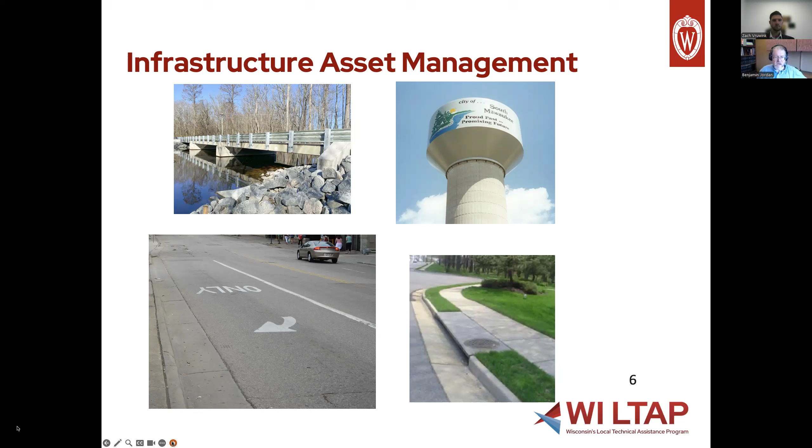And I put a few photos here to kind of represent the types of assets that we're dealing with in local government and cities and villages. These are ones that are visible. I can take a picture of them and you can see them, driving down the road, walking down the street every day. There's other assets that are hidden, and we'll talk about that difference as well.

So you have bridges, you have your street pavement assets, you have your water utility system, you have on the lower right, you have stormwater, and you're seeing an inlet, which is a place where water is taken into that system. And so that's visible on the surface. There's obviously a lot of that system that's buried under the ground. The same with the water system. All of the distribution piping is buried under the ground. You see the fire hydrants, you see the storage tanks, you see your treatment facilities, your well house, but there's a great deal of that infrastructure investment that's buried under the ground.

The same thing is true for the sanitary sewer system. There's a drain on the sink in your house, there's a toilet you flush, but all the piping that takes all of that waste away, you don't see it all. You see a manhole cover in the street, and that's the only part of it that's visible to you until it reaches the treatment plant. And then obviously the treatment plant facility has buildings and equipment that we can visually see, but a lot of this system is buried underground as well.

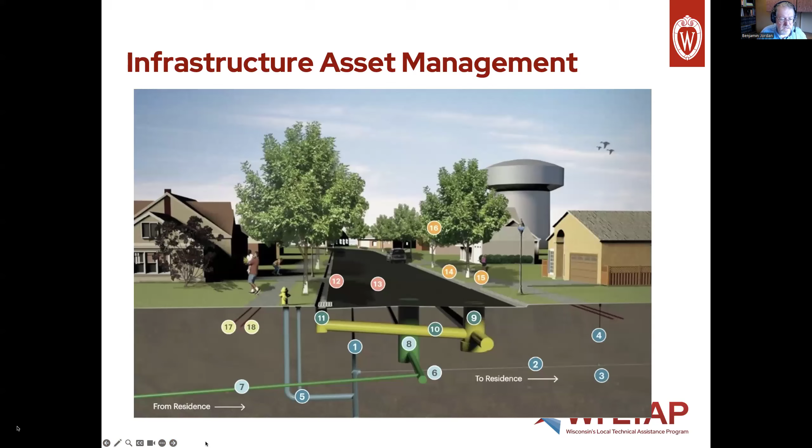Certainly, the public is interested in, and I'm sorry, I kind of went ahead a little further than I planned to. Things are moving around on me here where I don't want them to. So I'm going to try to go backwards here and then go forward again. I think I accidentally skipped over this one. And so I'm going to do what we were talking about, and then I'm going to jump back to that. I apologize for that.

So the things that limit us a little bit on just setting that condition really low is obviously we have the public who expects certain levels of service from us. So that may vary from community to community on what's expected, but we do have our duty to our public to try to preserve things in a condition that's acceptable to them. And there are also safety and liability issues associated with not maintaining assets. So the other reason we're going to kind of be controlled on what those minimum levels are is we don't want to create unsafe conditions. And so those are things to think about in conjunction with these statements as well.

So I am going to go back to this one because I don't believe I covered this. I think I somehow jumped over it.

In the draft guidance, they talk about some clarification of what infrastructure assets are, the things that we can use this modified approach, and that includes things that have multiple components that are part of a network, and we've kind of talked about that already. Utilized for a particular public service, and it says buildings should be included if they're part of the network, but you don't use this method for standalone buildings. You don't use this method for vehicles. You use this method for network types of assets. So it's trying to clarify that a little bit for people.

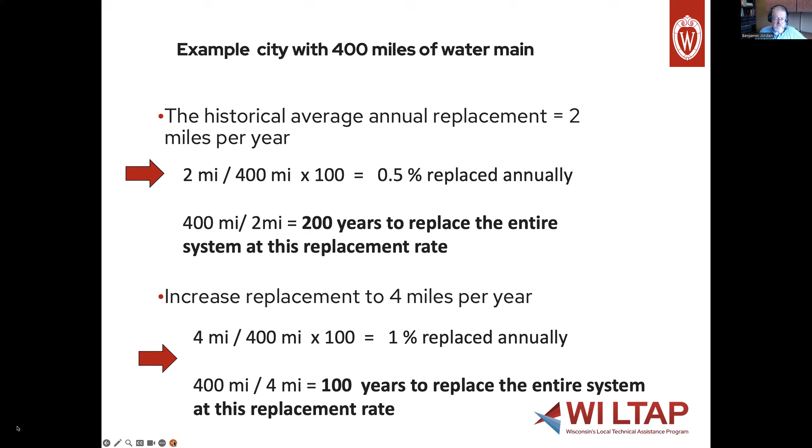And so we haven't even analyzed condition at all. All we've looked at in this quick example is how many miles do we have? How many miles have we replaced? You could do the same thing with pavement. You could do the same thing with vehicles and equipment. That doesn't meet the GASB guidelines, but it gives you some information very quickly.

Obviously, to do asset management as described, you're going to need an inventory. So we're going to talk about a pavement example. We need to know the centerline length, the width, the thickness of the material, and the base course material that's underneath it. And we may want to know how much traffic it carries. If we have information on how much heavy truck traffic it carries, that's going to be helpful too. So there's a lot of data we'd like to attach to every segment of pavement.

We'd like to have some information about how the pavements deteriorate. We could develop our own information after we've done a series of evaluations over time, and we could actually get information on how our pavements deteriorate. In the example we'll look at for the tool that is available through WisDOT, there is a standard deterioration curve that's based on some statewide average information that is used to figure out how pavements can be expected to deteriorate.

We have an evaluation system. There's a simple free one that's called PASER, which we'll mention. You can use a more sophisticated system if you wish as well. And then, how do we estimate useful life? How do we plan for rehabilitation, replacement, and then how do we transfer that into our capital planning? So I mentioned a rating system for the pavement assets, it's called PASER, P-A-S-E-R.

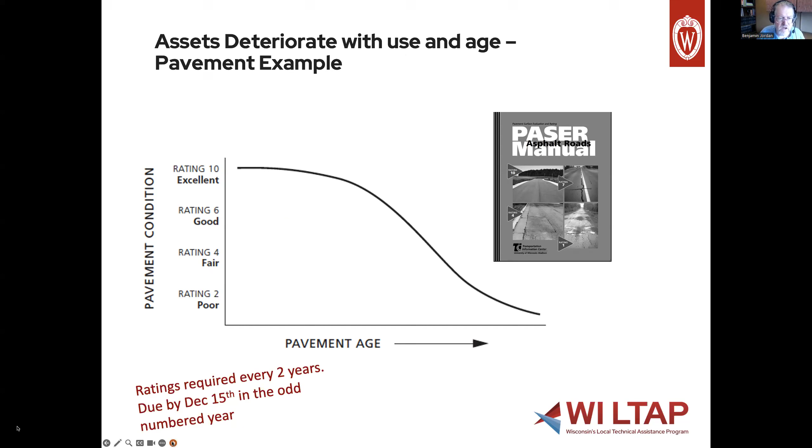I would like to give a little bit of feedback on what we're seeing from some of those ratings. I don't actually receive them. The DOT receives them. The DOT doesn't use them to allocate funding, but they do look at them to look for trends. They look at them to try to discern what the needs are in the local system.

Sometimes that can be difficult because some of the shared revenue we get through GTA, we don't use that all in ways that improve the pavement and extend the life of the pavement. So if they're looking at ratings and looking at the unmet need based on ratings, they're not seeing some of the other things that we do associated with drainage and other improvements that are going to affect the road but aren't directly related to the pavement.

But some things that I've heard in discussions with the DOT, some things I've observed from going out and looking at pavements with local agency folks and looking up what they submitted as a rating and then visually seeing the same road. Rate based on observed condition, because we do see some mismatches between the numerical ratings that are received and the actual condition. So one of the ways I describe that is don't wish rate.

You can imagine somebody who's responsible for the pavements in your system, and they have a limited budget and they're trying to make things work. They may not want to report to you that a pavement is in a pavement condition rating of 2 or 3 and needs reconstruction. And they're hoping that they can get away with just a maintenance surface treatment on this road. And so, I'm not saying this happens all the time, but I have seen it where the rating gets pushed up to a 5 because a rating of 5 would match up with doing that maintenance treatment.

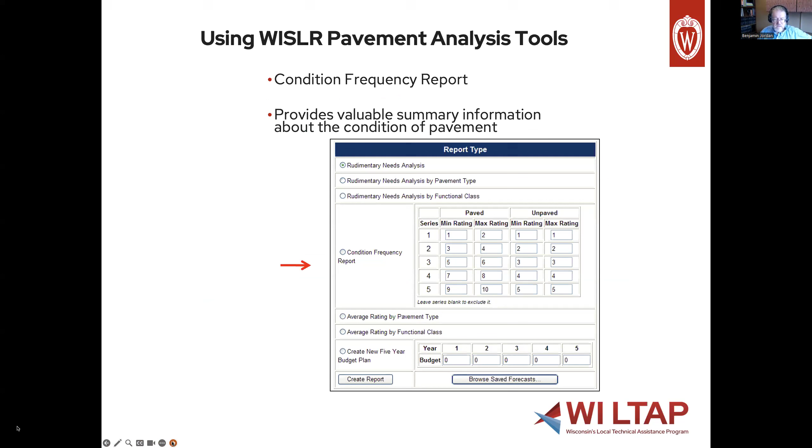There is a tool for us to report the condition, to put our inventory into the system, and to do some 5-year planning as well. And it's called WISLR. And this is just a page showing the inventory. And then from that, it also has the ability to give reports about the condition frequency. And so you can look at your system and it'll show you right now what percent of your system is in different categories of condition. And you can customize these bins, these categories.

So this agency, everything 1 to 3, they're going to reconstruct. And so they have those all in one category. 4s would be an overlay strategy. So they have that rating separated out. 5s to 6s would be a surface treatment like a chip seal or slurry seal. 7s would be crack sealing. 8 to 10 would be no action. So that's how they've sorted those out. And you can see almost 30% of their system, and this was real data from an agency in Wisconsin, 30% of their system needed reconstruction.

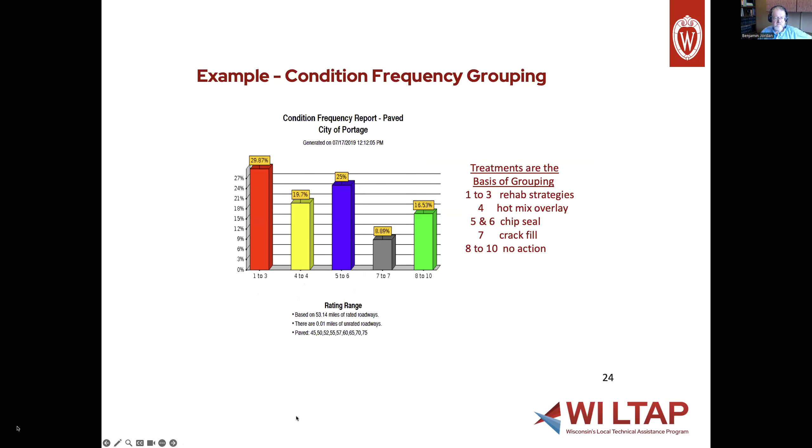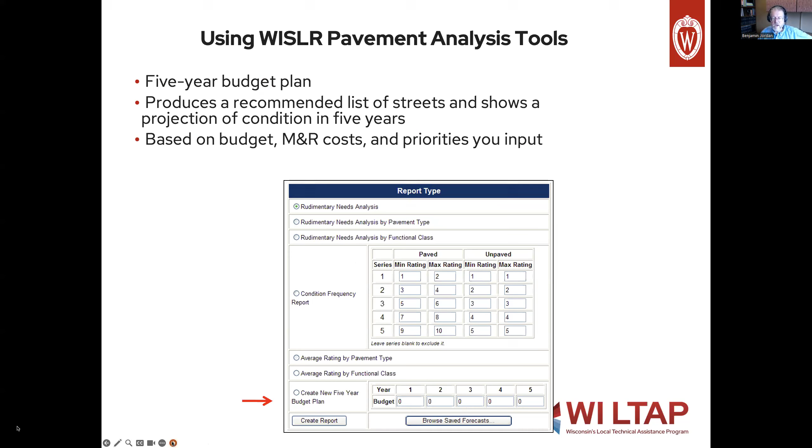So that's pretty significant. And then another part of that tool allows you to create a 5-year budget plan. So you put budget dollar amounts in for each year for 5 years, and then you ask it to create a report, and it will use a prioritization that's going to favor low cost early maintenance because we're most cost effective when we invest dollars early in the life. So it is going to be biased toward that, but it is still going to pick up some of the roads needing reconstruction, but it's not going to take a worst first approach and dump all the money into those worst condition roads because we know that's not the most cost effective way to manage this asset class.

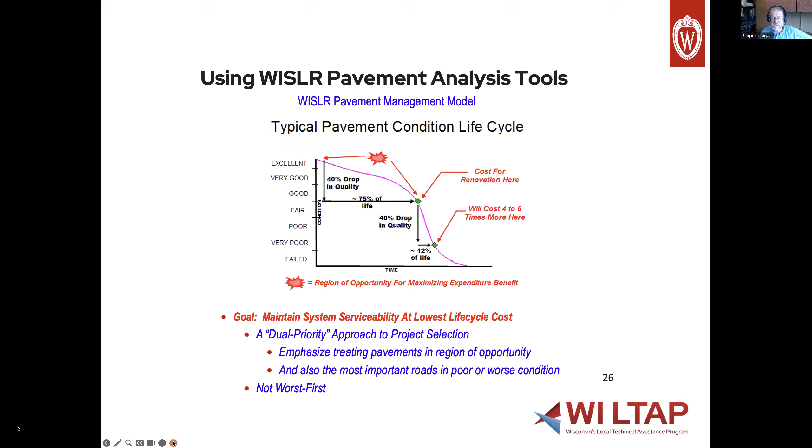So from that, we put 5 years worth of budget in there, and it has all of our pavement segments and it has their current condition. And it has default cost data, but we can actually update that cost data to our actual costs and the type of treatment that we would use for different rating types. And it will give you a distribution of here we are today. It's a different set of data, so it's not the same one we just looked at. Percent of system in these different conditions, and then based on the budget we proposed, what percent of the system will be in different conditions at 5 years.

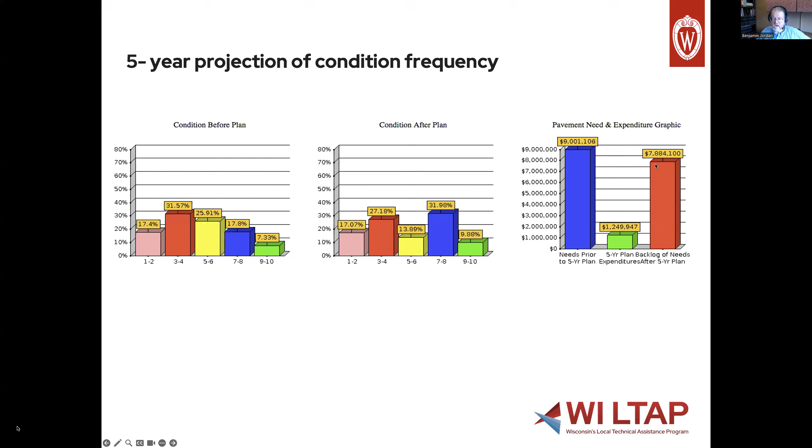And you can see they're putting enough into this system that they're actually increasing the new pavements or newly overlaid pavements percentage over that 5 years. And here is backlog of work, and they show a reduction in backlog. So it can show you that. And you could run a series of these, but first, it will give you an output of the suggested roads, what year they should be worked on, and what type of treatment should be done.

And then that also can be dumped out into a spreadsheet because you could tweak things and move things around because you may have other priorities based on when you're going to be doing utility improvements on the same road. You may have a priority because of the type of land use that a road serves. You may have other reasons why you want to move something around. So you can output it and adjust it as well.

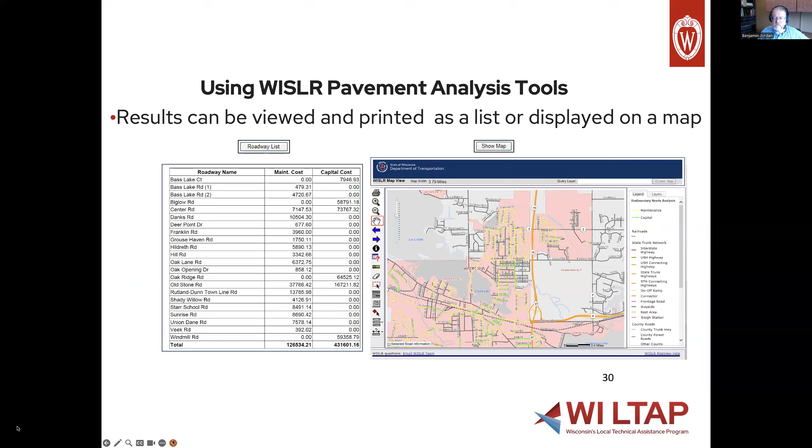Right. And for some reason we froze up on this one. There we go. It can also map this information. So you could have that 5-year plan and you could map visually where those roads are on your system, which can be nice from a presentation standpoint.

So one of the ways this can be used in some of your discussions about, what are we going to do with our pavements and what's our plan for the next 5 years? You could use this tool, which is a free tool available to all the local governments. It's online, it's web-based. You already put data into it on condition, and you already have inventory in there. And so here's a suggested approach. Run a do-nothing budget. And the way to do a do-nothing budget is you put $1 in for each of the 5 years.

A reduced budget, maybe 25% less than what you did last year. One that is normal, which is like last year's plus a CPI factor or however you might do that. And then one that's larger, maybe not outrageously larger, not like you're trying to figure out how to take care of all your backlog in a year because that would have a huge budget impact. And then you can run each of those alternatives and look at how they compare.

And then from there, you may use that to identify one of those that is your best choice, or you may see that something in between your current budget and an increased budget might be reasonable. So you might do another run somewhere in between to get down to one that is a good proposal. And so here's examples of those outputs.

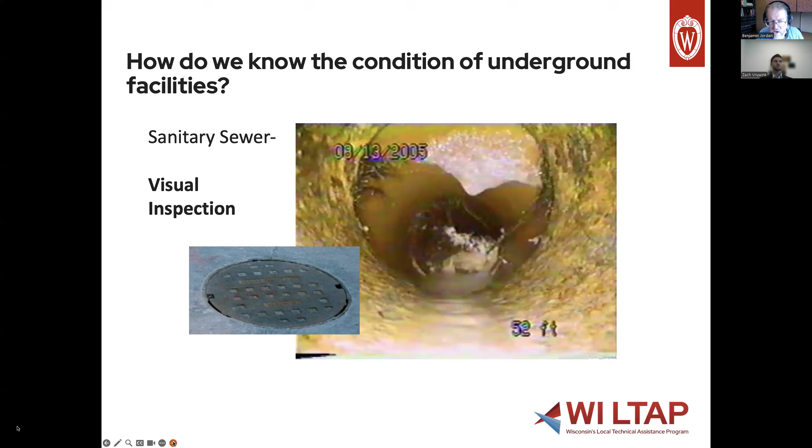Some of those assets are buried and we can't see them. And so what do we do with those? We can do visual inspection of some underground assets. The sanitary sewers and the storm sewers are not under pressure. And so in times of normal flow or low flow, we can put a camera in there and do a visual inspection of those, and we can do a visual inspection of manhole structures. And so that's a very common way to evaluate condition of those assets.

For things like water main that are under pressure, there are starting to be some tools out there that say that they can be basically inserted into a pressure pipe under pressure and move through the system and do things like characterize roughness of the inside surface and the thickness of the wall. So starting to be some things that can get you some of that type of data, but they're not that commonly used at this point. So not experimental. They are out on the market, but it's just not in common use.

So some of the things we do is we look at failures. Every time there's a failure in the system, we should be recording data about that, recording the location, recording the type of break that occurred, the depth it was at, the soils that are surrounding it, any of the factors that could affect why those breaks occurred should be recorded.

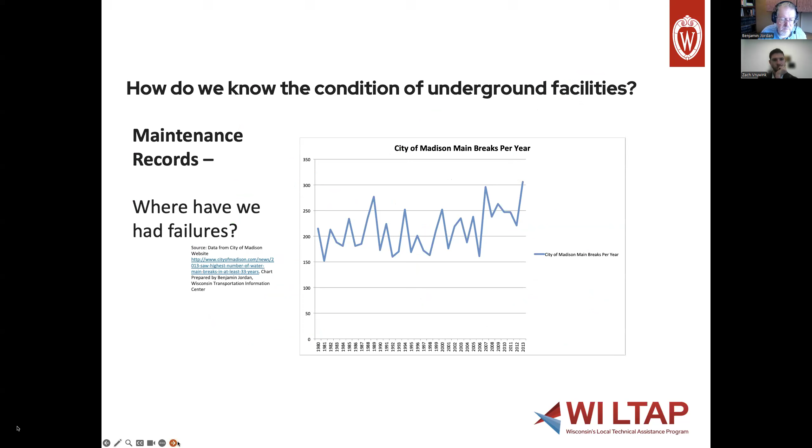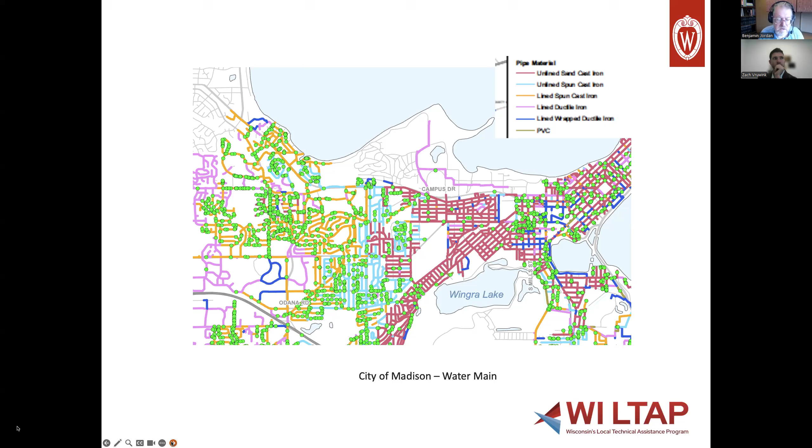And it may have to do with the soil conditions. It may have to do with some things that were not done well in original construction. There are a lot of environmental factors and other factors that can make the same material perform differently in one place than another. So we map those conditions and we try to identify trends and identify problem areas through that.

Other assets, vehicles. Typical approach is we say, here's an expected useful life of these vehicles. Let's set up a schedule. A 1-ton truck is going to last for 8 to 10 years. So let's plan 8 to 10 years out to replace that. A loader is going to last 18 years. Let's plan to replace that.

And there's an approach that strictly looks at that maintenance and repair and says, when maintenance and repair gets to 30% of the residual value of the piece of equipment, we should start thinking about replacing it. It becomes a candidate for replacement. That approach would get us replacing a lot of these equipment assets much earlier than we do currently.